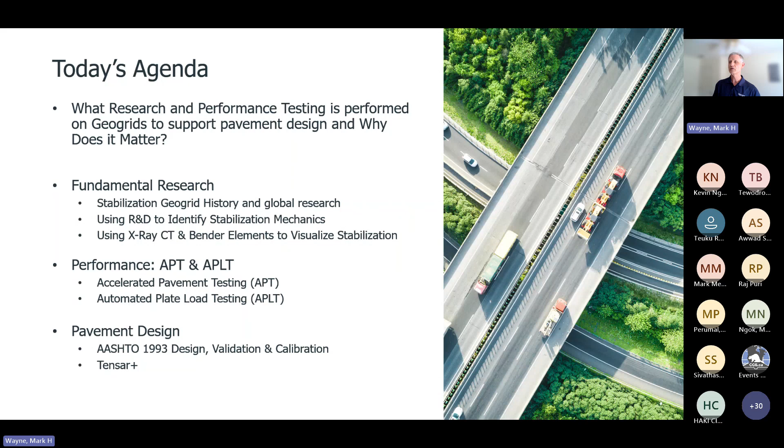So in following along in those footsteps, we're going to look at fundamental research that at least our company, TENSAR, has been doing for many, many years. We're going to look at performance testing. And what do I mean by that? I mean, you can do the fundamental research to kind of put your head into the position of seeing what's going on, but then you actually have to take that information and do performance testing. And then we're going to talk about how we take that and roll that into pavement design. Because of the time limitations, we'll talk about one aspect of pavement design, okay?

So, fundamental research. The one thing that Dr. Koerner also impressed upon the world by his book that he published, Designing with Geosynthetics, is that we fundamentally design based on the function, right?

So I like to tell people, what does that mean to the common person that doesn't know anything about geosynthetics? What I tell them is, you can buy Velcro to hold your pants together, to hold your shoes together, or to stick a painting on the wall.

If you put it on your pants and your pants have to go through a washing machine and be agitated, there's different criteria for how much Velcro is there. If you're putting it on a wall, you better make sure it has the proper capacity to hold it on the wall. So geosynthetics are no different.

You have to look at the function, what we're doing with the geosynthetic. Are we putting it in the ground to separate things and provide filtration and drainage and all these different functions? What are we doing with this?

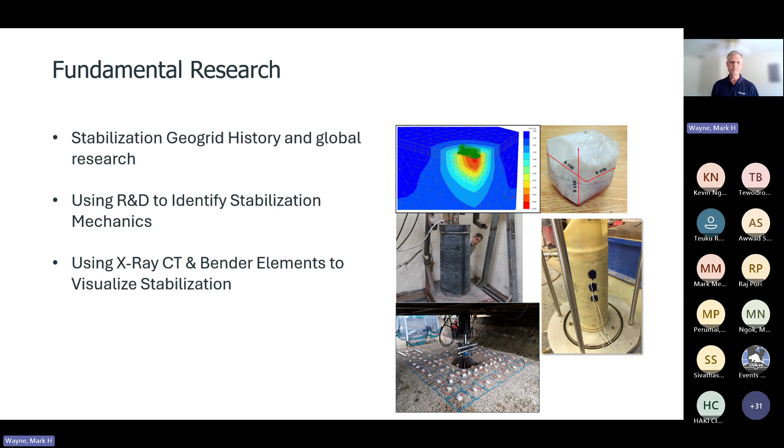So we're going to cover a little bit about what geogrids are used for primarily in the field of transportation engineering. We're going to identify the stabilization mechanics and then talk about some of the research going on at universities and actually at our facility as well.

Stabilization is literally defined as the improvement of the mechanical behavior of unbound granular material by including one or more geosynthetic layers, such that the deformation under applied loads is reduced by minimizing movements of the unbound granular material.

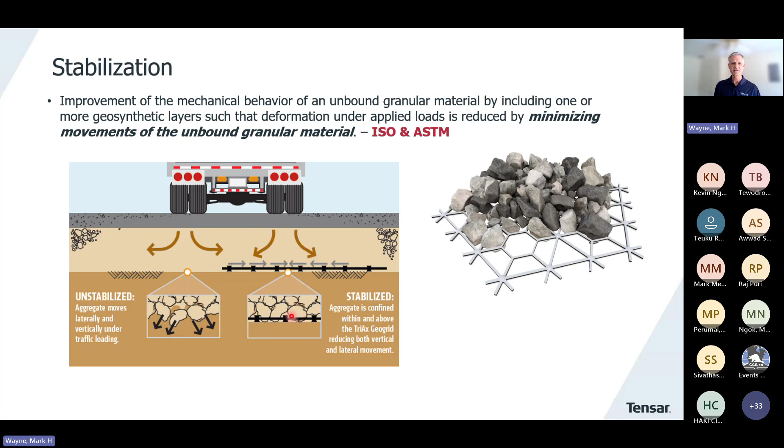Now, many people know, you hear it all the time: 'Hey, I have this geogrid, but it's got a square aperture, is this good, can I use this?' But wait, I also see there's one with a triangle, is this good, can I use this? And the last, you're going to see one that has three different unique aperture shapes.

You would say, well, what differentiates these materials? The key is that as we evolved with our education, in the sense that we did some of this fundamental research, we realized that the shape of that aperture and the shape of the ribs control the behavior of the surrounding material. That's pretty important.

So over time, the aim has always been to perform fundamental research to find out how these shapes work, in fact, before we put these shapes into the market, they're tested along the lines we're going to talk about. The idea is to increase particle and geogrid interlock, increase that confinement, and increase trafficking performance and value.

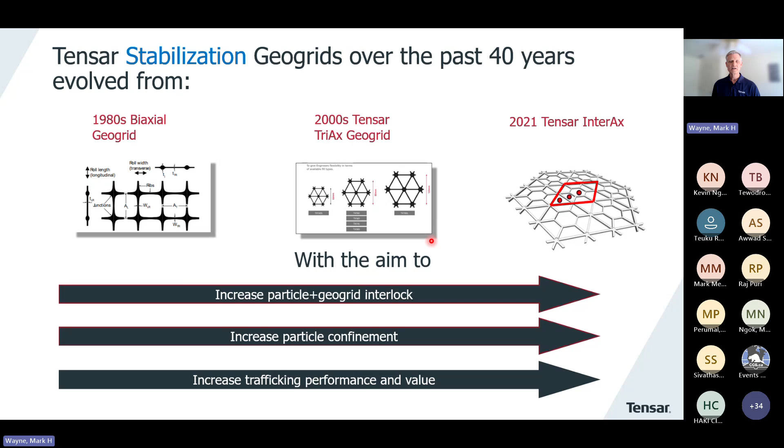So having gone from a square or a rectangle to a triangle, the reason for that first jump was because we realized that particles pack better in triangles. The next jump, which we weren't able to make when we started out performing manufacturing on triax geogrids, was how do we get multiple shapes, multiple apertures into one geogrid?

The reason for that is we also know that although particle packing is great, that packing is good for one set of particle sizes. So if I have a triangle, it's a single shape. If I have multiple aperture shapes, it's going to interlock a range of particles into the structure. And that's exactly where we've moved.

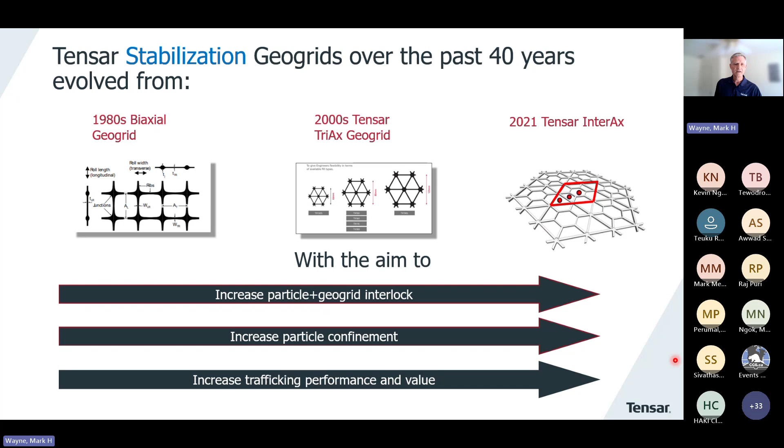So back to stabilization. The key here is that by having these particles interlock with the aperture, we also want to make sure the rib is not laying flat. That was the original generation.

The original generation, the biaxial geogrids, were used for embankments and those sorts of things, basically going out on swamps and placing material on swamps. In that particular case, you were getting separation, and if you needed a geotextile to go underneath it, you would add that.

And you'd ask why that's important. Because if you can keep all the particles together and prevent them from moving, you also prevent them from rotating in place. You prevent rotation, you prevent movement, and as a result you limit deformation - you get less deformation. By doing that, you also increase the shear capacity of that composite, which increases bearing capacity - something all these projects desperately need.

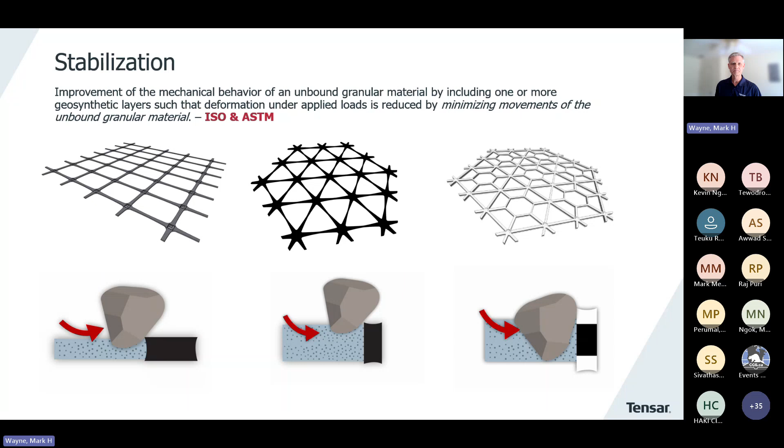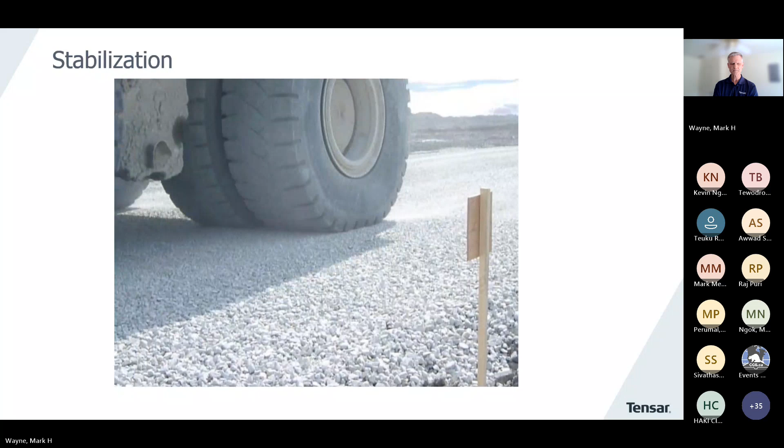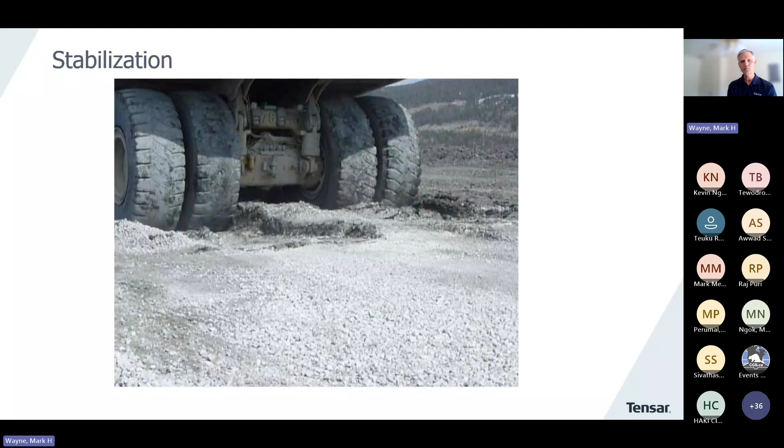Everybody wanted to prove to themselves that the geogrid was going to work for them, so they built a test section. And there you go - that's what would happen if they put this material onto the soft soil. So what you see here is not stabilization, basically you have punching failure.

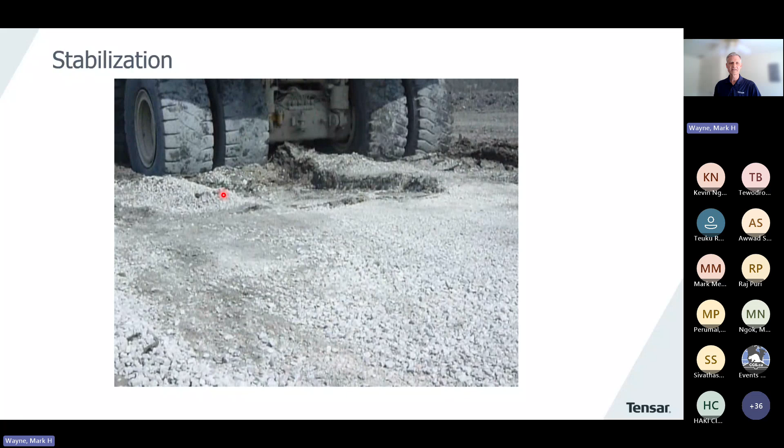In the early days when we started to get instrumentation to see what's going on, we worked with Penn State, and they said, how about if we build ourselves a smart rock and put the proper instruments inside of it so we don't need wires. We said if you can manage to do that, we're all on board. So they managed to do it.

Our first set of tests with a smart rock were done to look at ballast behavior - what happens under the dynamic loading effect of ballast, which seems to be what a lot of people are concerned about, especially because if you get a lot of movement of particles, you get particle rotation and movement, and that causes breakdown of the particles over time.

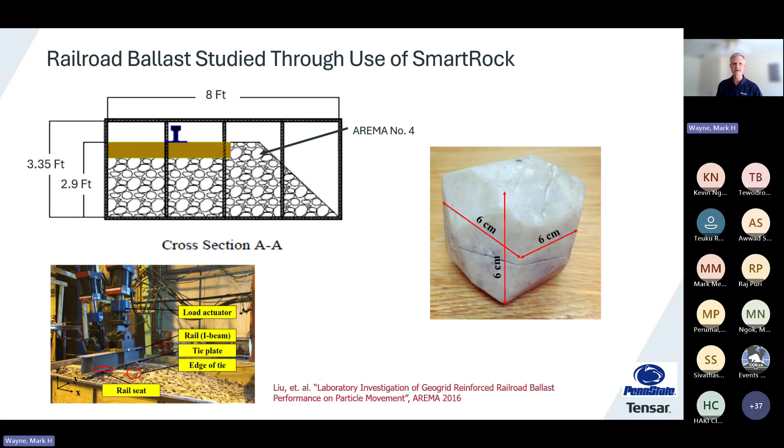In rail sections, they have to go back and fix that - they have to pull the track up and replace that material. So then you'd ask, how do we have them prove to us that this thing worked?

They did this little video for us and showed, here you can see rotation - there it is. And then you can see translation. So those were the things we really wanted to look at.

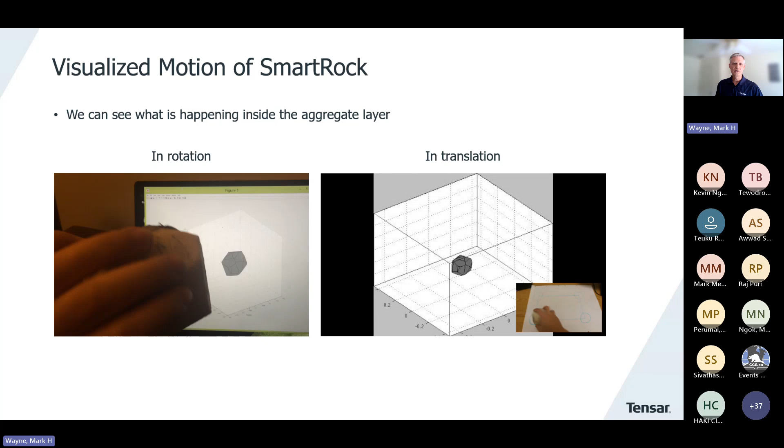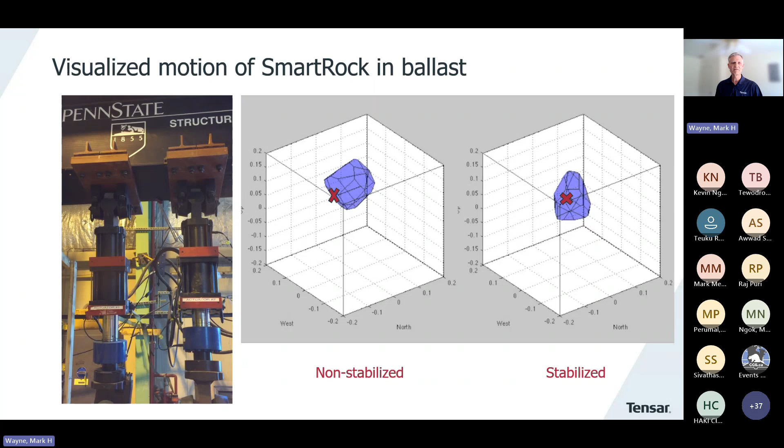During testing, they were able to plot this up. The X is at the center of the smart rock in the non-stabilized and stabilized section. We put these underneath that load, right under it. You'd imagine you'd have more confinement directly under the load.

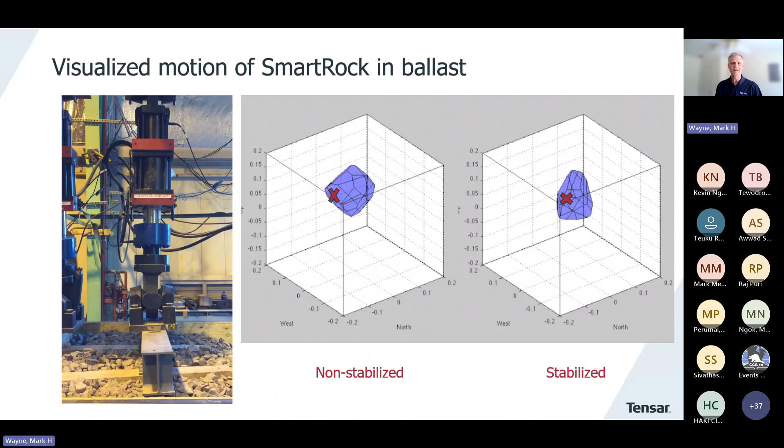But as you can see, for the case without the geogrid, you were getting a combination of rotation and still getting movement of that smart rock within the system. If we plot this up, looking at the smart rock under the rail seat versus under the edge of the tie, you could see very clearly that for the stabilized sections, we basically stopped movement, which everybody was really amazed at. It's pretty amazing when you see this.

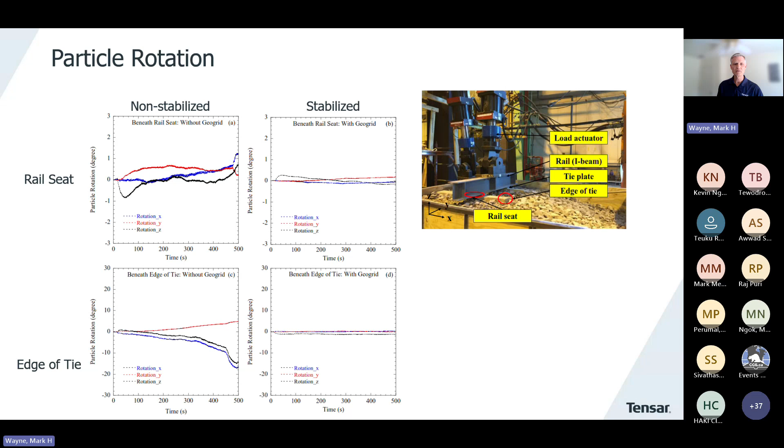This in particular is particle rotation, and if we can keep those particles from rotating, that's the first step. Then there's particle translation. We do see some movement, but the interesting part is those particles - because when you have a geogrid, a lot of people have heard the term compaction aid.

They're called a compaction aid because when particles nest inside the geogrid as you're compacting, they nest to the lowest potential energy they could possibly have, meaning they're not just sitting there. As someone asked about this, I said imagine if you have a brick - if you stood the brick on end, it has high potential energy, but if you lay the brick flat, it can't move much beyond being flat. So the idea with the geogrid is that we prevent the particle from rotating.

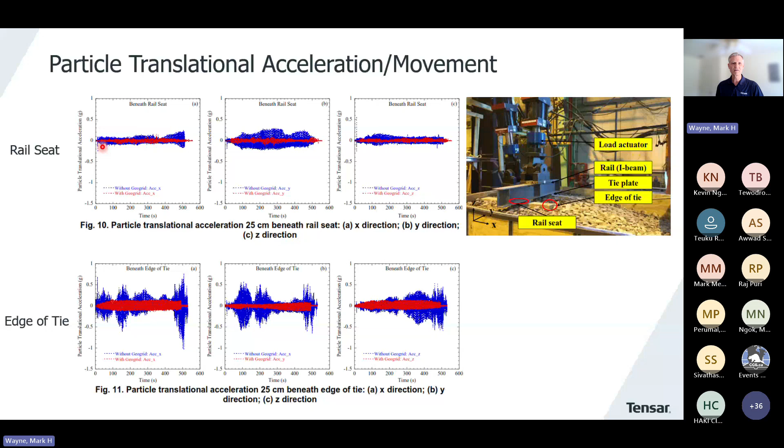If we then plot simply the vertical displacement versus the permanent deformation, you see there's a dramatic difference. Along the lines of rail, we have the University of South Carolina right now doing some full-scale testing with our InterAx products to look at that. In fact, we're taking it one step further, looking at saturation. The biggest issue is when it's dry, things could be great, but as that track section gets saturated, things change pretty rapidly. So we're looking at that now.

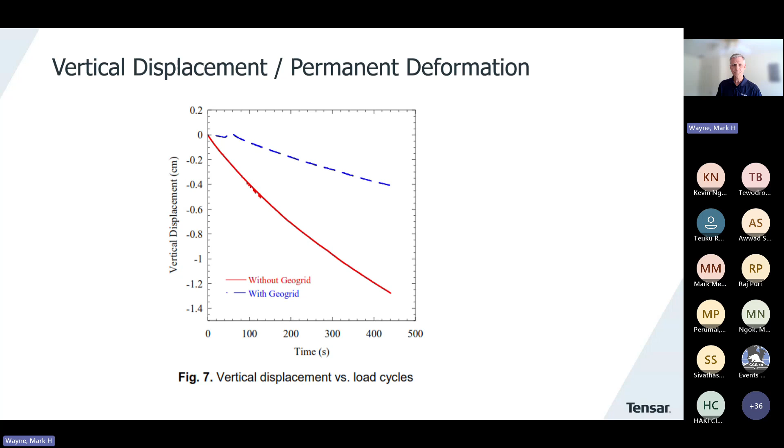So the other thing we do is we need parameters to put in our design. As I said, we have to do some fundamental testing. On the right side is a triaxial cell, 0.5 meter in diameter by 1 meter high. You can see we're taking measurements of how much this bulges along the extent, getting the lateral strain, and finding out this influence.

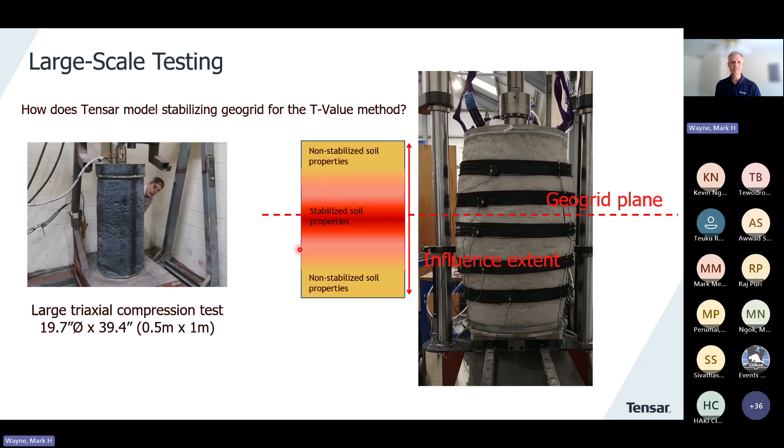If you look at this graphic, you can imagine that the geogrid, when placed, has the greatest influence around the geogrid itself. The neat thing is when we plot this up, what we've noticed time and time again is that if we look at load versus axial strain, when we incorporate the geogrid, there's a huge amount of strength that is imparted, so there's greater ductility. If we look at the curves without the geogrid, you can see it drops off over a much larger axial strain range.

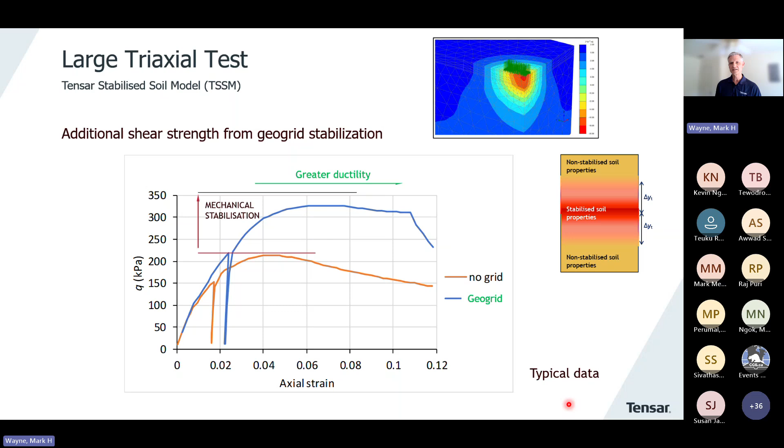And then we can take this information - we've taken that and put it into Plaxis. So we've actually developed our own TENSAR stabilized soil model that is utilized to run Plaxis models.

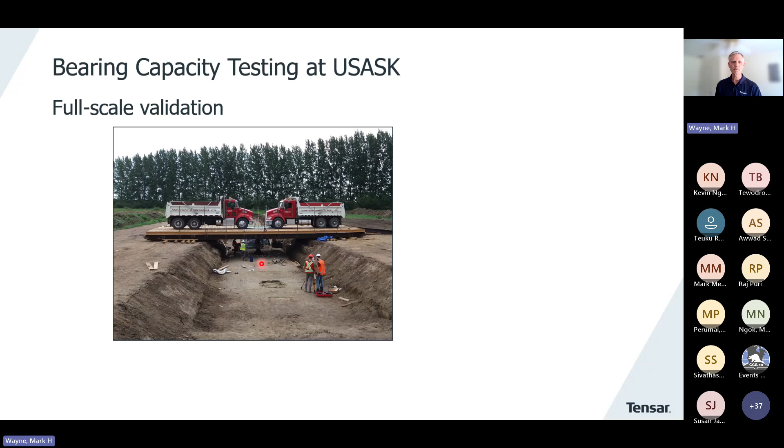And here's work Ethan's very familiar with, looking at plate load testing up at the University of Saskatchewan. Very uniform soils here that we wanted to test, very soft, with the platform on top. These little blocks are for video and photos, getting an idea of the influence of this vertical load on the surrounding area. And we're using a 1 meter square plate.

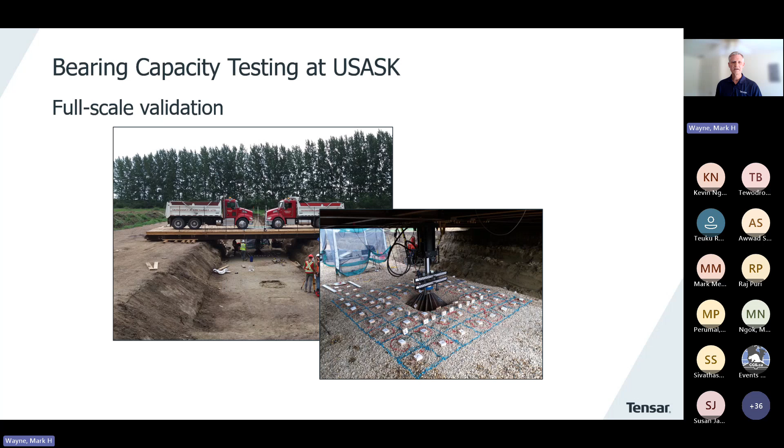You'd ask yourself why? Because heavy haul road equipment, that's the area they're going to apply. Working platforms, cranes, that's the area that gets applied. So we wanted actual information that could be input to design. Now, back to what I said, you saw the large triaxial cell - if we look at the plate pressure versus displacement, look at the curve, you're getting a similar curve. So that's critical.

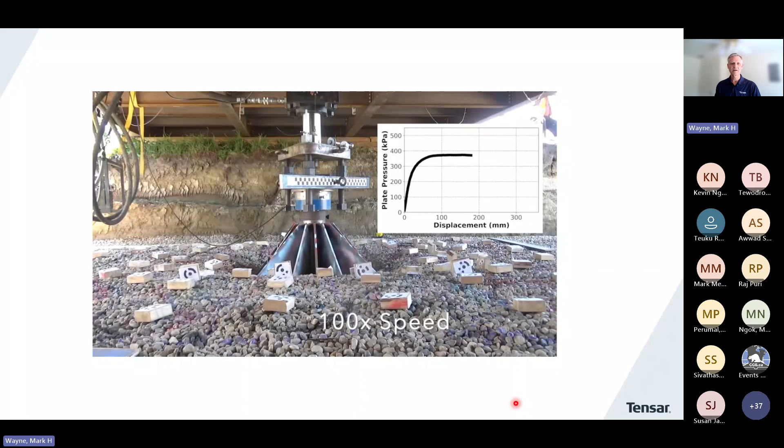Now the latest thing is - we talked about a smart rock, full-scale testing to get some design parameters, and triaxial cell testing to get design parameters. The question then came up: okay, you keep telling me, Mark, that this rotation we see in the ballast - but ballast particles are fairly large, so that sort of makes sense to us. What happens for other particles more along the lines of a road-based material?

Interestingly enough, at the University of Grenoble, they perform X-ray computed tomography. Somebody's like, wow, what's that all about? If you go to the airport and see these big igloo-looking things your bags have to go through, those igloos are performing X-ray computed tomography in real time. They're actually able to see your bag, rotate it, and look inside at elements that are there. So X-ray CT is something we really want to do work with, and they said, hey, this is great.

We can put some geogrid in a cell, place the particles, apply a load, and see what happens. So you have sample prep, you do the scanning, and then you do the image analysis - it's a multi-step process. I show this sand sample because they have to rotate it, right? So they perform the X-ray - obviously this isn't the igloo you see at the airport.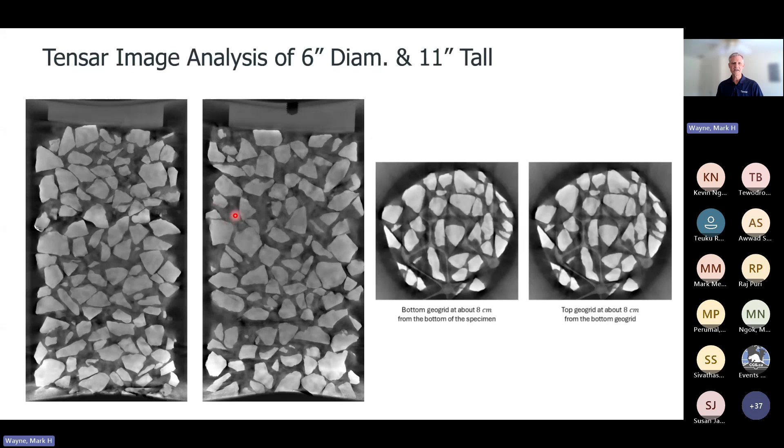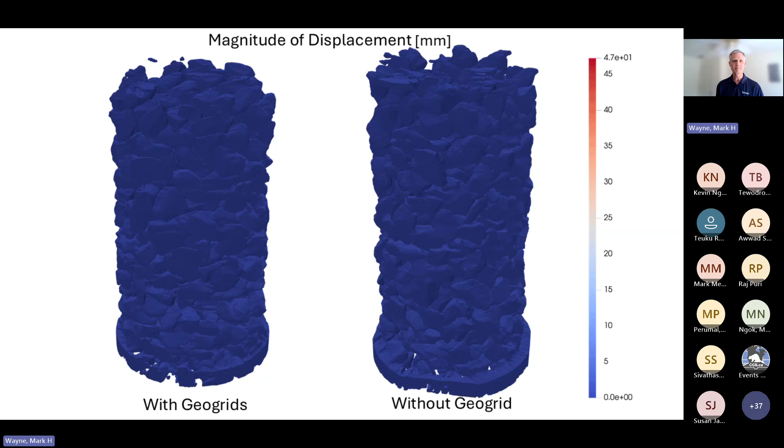So having this information and performing the CT analysis, we can clearly see every single particle, like every one of these particles is a smart rock for us. First off, we can see the displacement that occurs, and without the geogrid there's much greater displacement. We can also see the rotation of every one of those particles. This is phenomenal stuff, right?

Just looking at the first case, and we're doing more research along these lines, the stabilization effect is 82% reduction in deformation for the sample and 73% reduction in particle rotation, which is very impressive given the variability of aggregates in and of themselves.

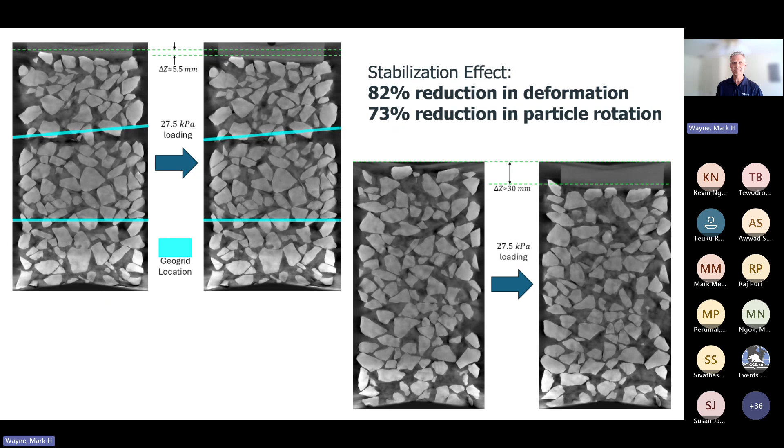So that was that. Now let's talk about bender elements. A lot of people may have read about this, it's out there on the internet, and you would ask, well, what are bender elements?

Well, the other question that came about is in some cases, some of the tests don't show that we've increased the resilient modulus value as much as we would have liked to. But wait a minute, we know that the deformation is reduced—there's like next to no deformation.

So what's going on is that some of the test devices, when you run a test on the surface in the field, you're testing that composite value on the surface. So sometimes you're not getting that stiffness. You would actually have to decompose the results of the test to look at what's happening from a standpoint of resilient modulus of that aggregate just by itself in relation to the subgrade. That's been a tricky thing.

Because in many cases we're using the foundational layer as the geogrid over a soft soil, then we're putting the geogrid, then aggregate, then geogrid again to serve as the foundation for the pavement on top. This happens for soft soils. So you'd have to run those field tests on the subgrade, and then on the aggregate as well, and probably do some computations to see what's going on.

Another way to do this without trying to correlate the results would be putting some bender elements in. As this graphic shows, it's a piezoelectric device where this end element is flapping like a fish—if you pull a fish out of water and it's flapping around, that's what this is doing. Basically, it's measuring the small strain shear modulus of the soil.

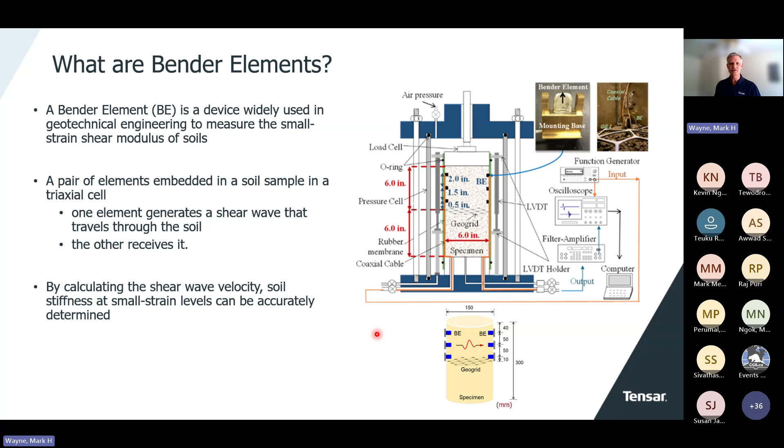Recently, University of Illinois, Dr. Tutumluer did some fundamental research on this, looking at a variety of different geogrids. We talked about how the shape matters, the aperture, the construction of the material, and the ribs—how does that all figure in?

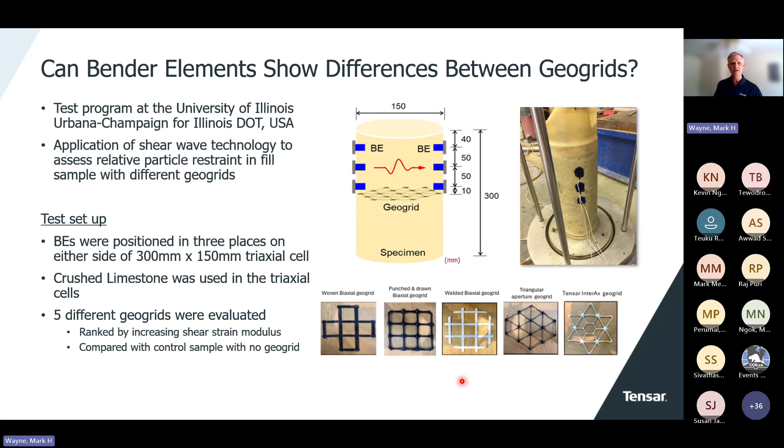So they used crushed limestone along the lines of road material. They looked at 5 different geogrids in the test, and what they found is shown here. As far as the difference measured between geogrids for the bender elements, there was higher small strain shear modulus measured closest to the geogrid, which makes sense. We'll see this in a graphic here.

And as you get further away, it decreases. But also keep in mind, this test is being performed under different load states. But then again, we don't have asphalt or concrete on top of this weighing it down. So this is just a triaxial cell test.

So basically, if we looked at a woven material, imagine the ribs are flat—it's woven, so it doesn't have that stiffness.

We looked at 8% lower small strain shear modulus, a biaxial 10% higher, and a welded material 13% higher.

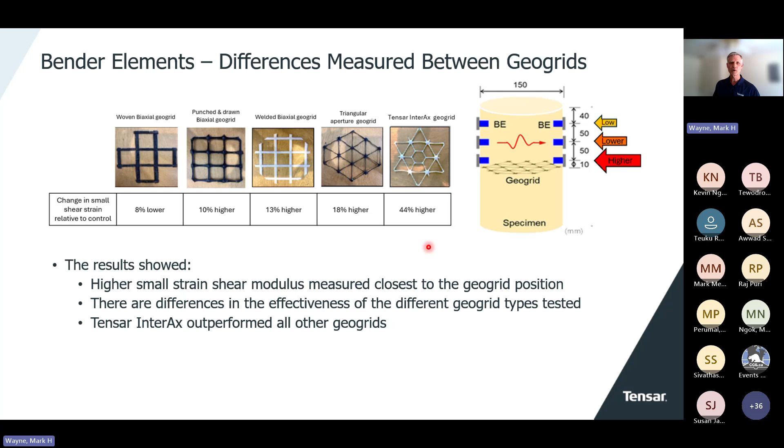The triax, which has higher ribs, showed 18% higher, and 44% higher for the multi-aperture. This proved to us that having multiple aperture shapes that interlock increases the statistical chances of interlocking more of the particles within the apertures, which has a huge effect. Along the lines I said at the very beginning, achieving this geometry and shape is achieving the goal we want.

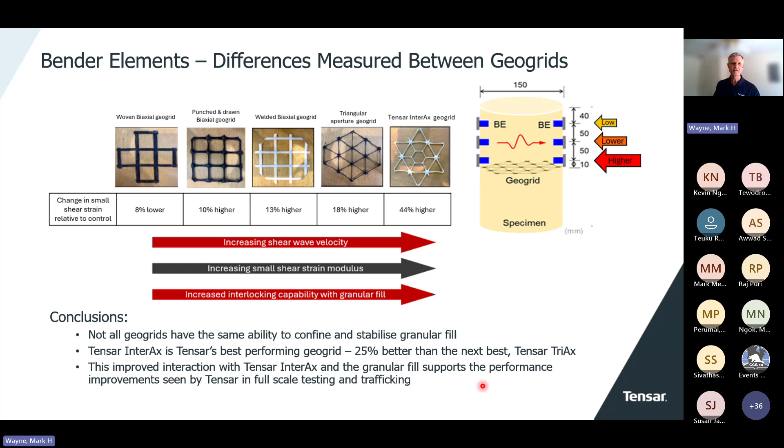So now we've done fundamental research to help get design parameters and also convince ourselves that it is important to prevent particle rotation, and it is important to make sure the geogrid has the right apertures and the right rib height. So what about larger scale or full scale performance?

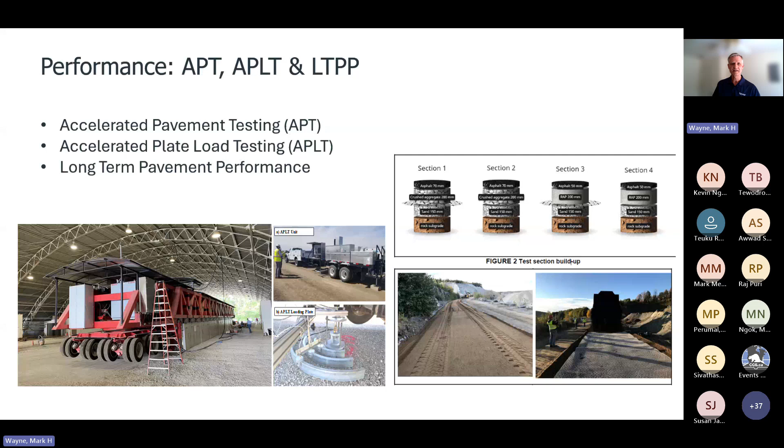But we're going to talk about some of these things here. There are research reports readily available for the things I'm showing you today.

If we look at the accelerated pavement testing, the idea is to basically prepare a road section, in this case an asphalt paved road section, with a section without the geogrids and sections with the geogrids. I'm going to show another video, hopefully that will work for us.

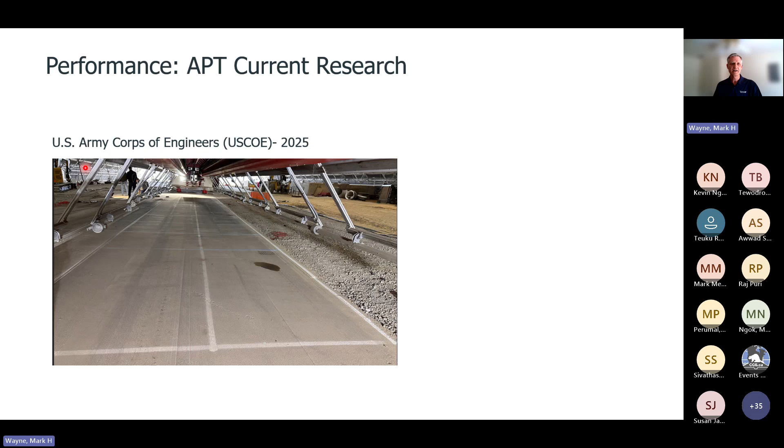You can see there are these elements for heating the chamber, and then doors go on the outside of this. The wheel's not here yet, but there will be a wheel.

For this most recent research we did, we looked at InterAx in comparison to the control, and we also changed the thickness of the layers so we have an idea on the design parameters and how well those design parameters can be utilized in the actual design.

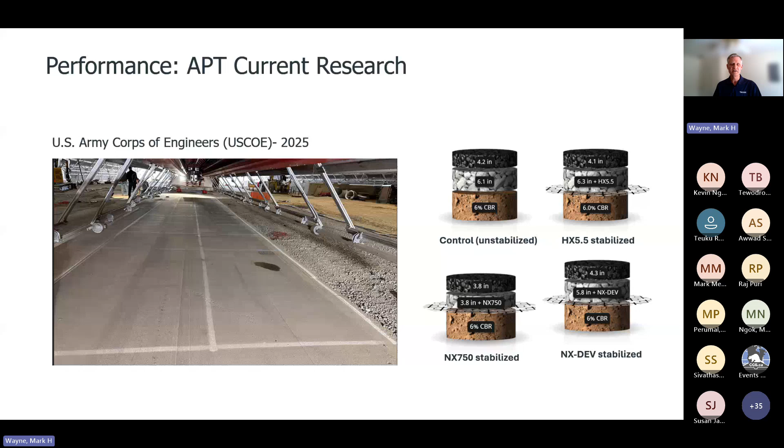And you have to instrument the heck out of it, right? So a lot of instruments were placed: multi-depth deflectometers, subgrade earth pressure cells, base course pressure cells, and asphalt strain gauges. The idea for the multi-depth deflectometers is to look at each of these layers and see how they're moving as the wheel is moving along the surface.

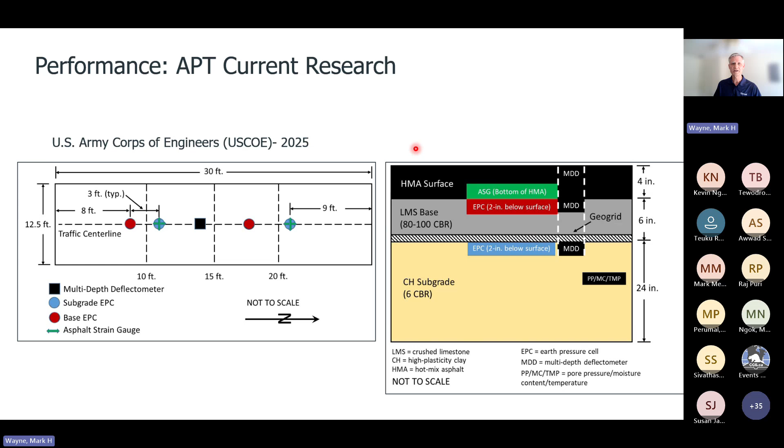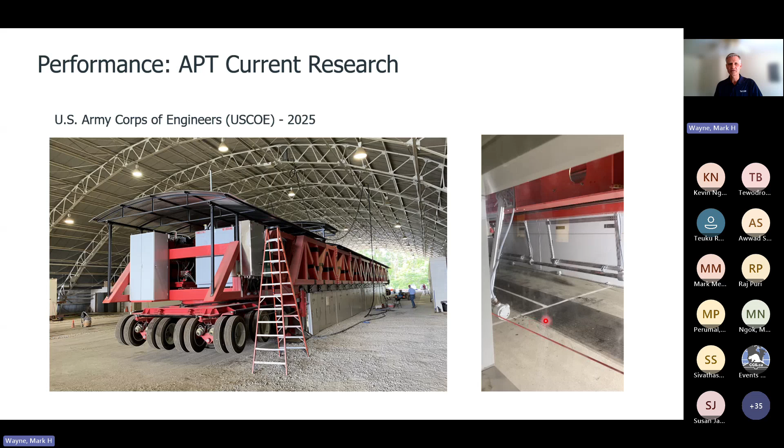You can see here that we have basically an environmental chamber, because we have these panels, you can see them over here, placed on the outside and insulated so that they can maintain the temperature. We want to maintain proper temperature inside and traffic the pavement section.

Now, automated plate load testing - imagine we've got all these design parameters, we've done the testing at the Corps of Engineers, and then somebody says, oh, that's all great, but what about in the field? What are you actually getting in the field? Well, if that's the case, we need to actually do plate load testing in the field.

What you see here is the piece of equipment. The equipment has to be weighted properly so that it can resist the force associated with the plate load test. You also have to have these steel bars here, because what are they doing? They're actually measuring the deflection bowl that occurs as a result of this load.

Now, every project's different. You would say, well, why don't you just run one or two tests? Well, we had to run a lot of tests because each environment and each aggregate is different, obviously. We try to get this parameter along with the large triaxial cell parameter that you see, so, for example, we can fill in the gaps of our knowledge.

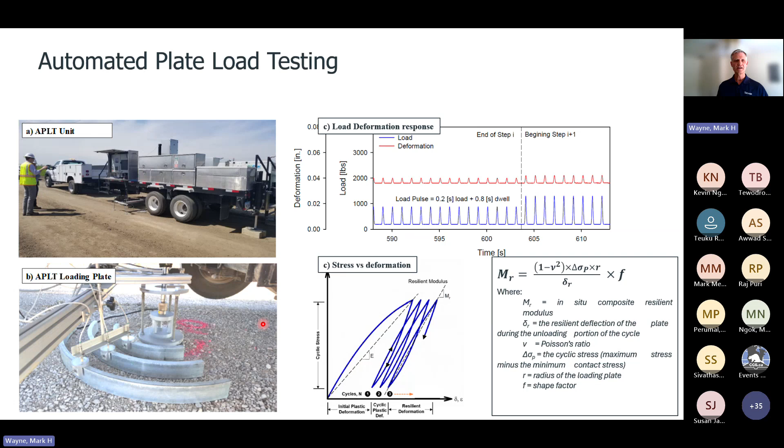So this could be crushed limestone, or we may have a different type of material. We can actually test those materials in a large triaxial cell and see how they fit in with the results of this sort of field work.

We've also gone ahead and taken all this information from the field and put it into a neural network to do analysis for deformation. Here's a graphic showing dramatic differences in deformation that occur with and without the geosynthetic.

So the bottom line is permanent deformation, right? That's what the end user wants to look at. What's going to be the effect of having this geogrid? In many cases, people want to save money on the road, so we're making the roads thinner, and we want to make sure the permanent deformation is minimized. That's the goal, and that's easily done.

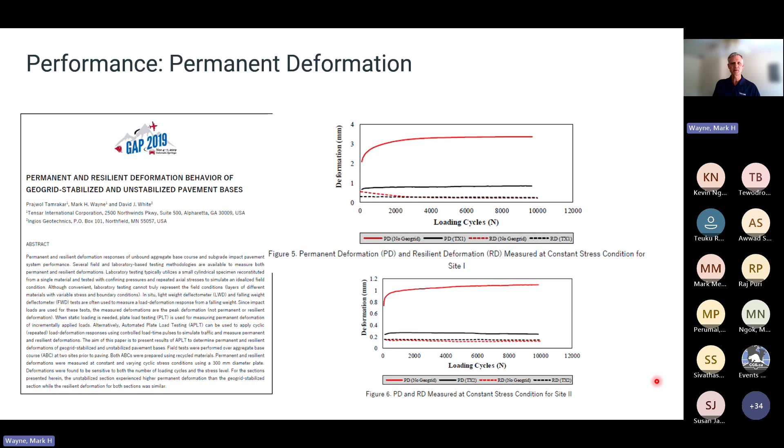The other important thing is that we want to make sure tests are done over a lot of climatic zones. That's important for mechanistic empirical design. I don't have time to go into that today, but it's very important.

So not only have we done a lot of testing in the West, what we refer to as the Western Hemisphere, we've done testing in the Eastern Hemisphere as well. We've been doing this plate load testing since 2014. Our database is massive and gives us the information we need to assure our end users that our design is highly accurate and is going to yield the results we say it's going to yield.

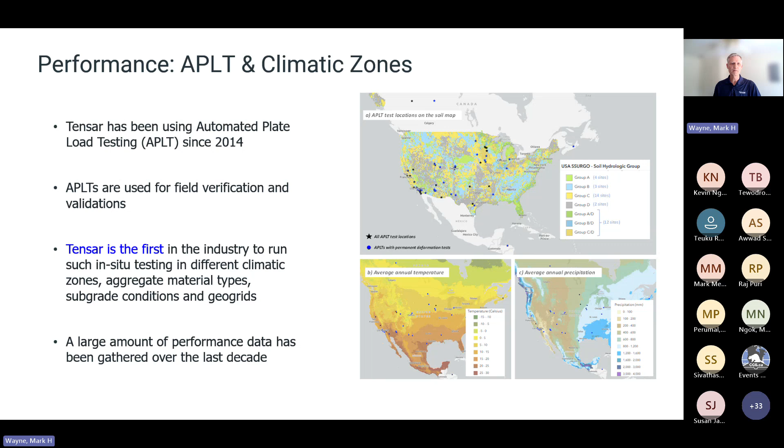APLT tests were initially used for field verification when we were in the research phase, but then it rapidly moved to our field engineers just using it to collect data and also assure the customer, hey, we designed it, here's our design, and this is the result you're getting from the actual tests in the field. TENSAR was the first in the industry to do this sort of work.

So that's important, and as I said, we're getting to the fact of using machine learning techniques as well. So now that we have this massive database, think of what we have. We have the tests done at University of Saskatchewan, for example, tests not mentioned, the large triaxial cell, accelerated pavement testing, and APLT in all these different temperature environments. The next step is to take all that and let AI take over. Let's model this. We can actually model permanent deformation and be highly accurate.

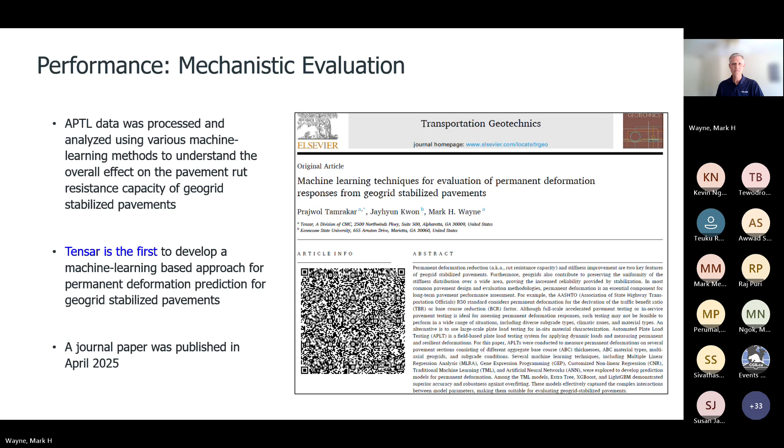Okay, what about long-term pavement performance? Some people say, well, how do I check to see that this new road we just designed and built is going to work? Well, we know it's going to work, and we've been doing long-term pavement performance as well for a number of years.

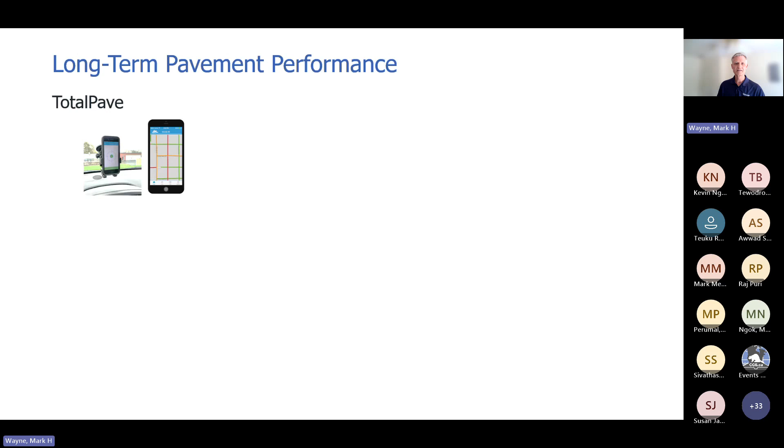You can download an app on the phone these days, and from that we establish, basically you're getting that vertical movement over distance on top of a road to compute the International Roughness Index. We use a company called TotalPave, though there are a lot of companies out there today. Basically, you're using all the technology built into your cell phone, which is placed on the windshield of your car.

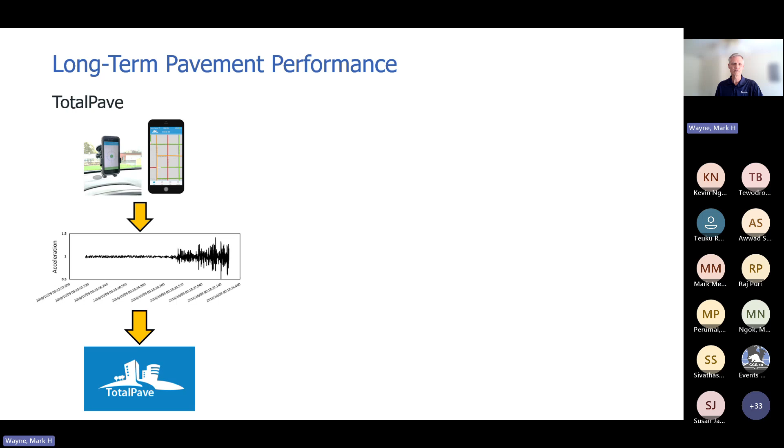It was interesting because we had some engineers saying, well, wait a minute, we paid all this money for a profiler, and you're telling me this is going to give similar results? And guess what, it does. It's been proved, and there are papers written on it. You can look them up from the TRB conferences and from the websites of folks like TotalPave.

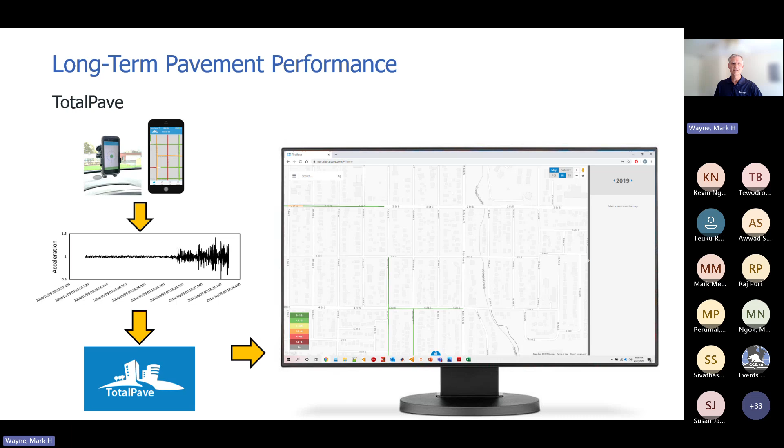And we keep all that data, so we have a large database of all this information. From this information, two things can happen. Before somebody wants to do road construction, they run their own profile across those roads, and they determine what sections are really bad and what are not. The really bad sections need geogrid designed into them, because there's likely some foundation conditions that demand it.

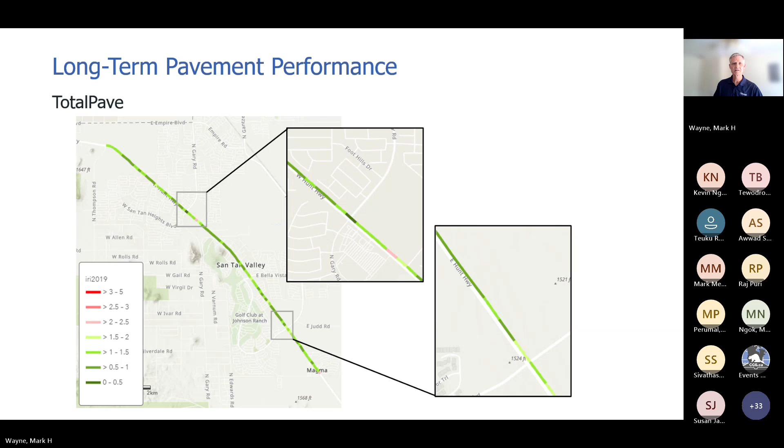This is a case where we had a project out in Arizona, and this is over a period of, I think it was 2019. So this is a snapshot, but roughly four years, looking at that performance over that time. It's pretty impressive. We're doing this all over the world, and we've written a lot of papers about this.

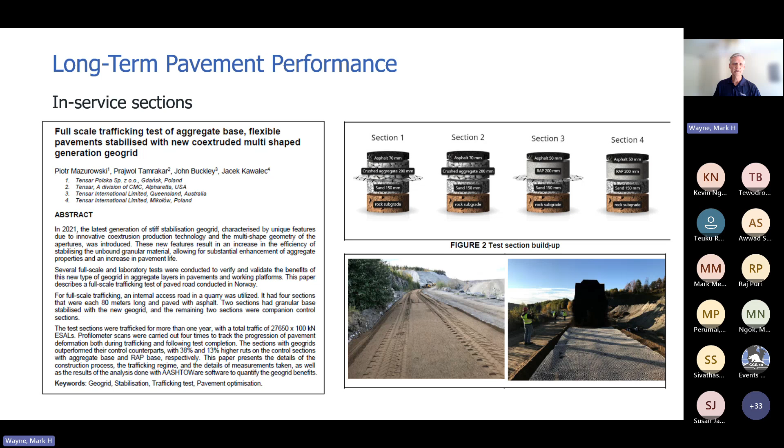And most recently, for the InterAx, we went to a quarry and asked them to use it to look at several different scenarios and evaluate the permanent deformation at the quarry by looking at the InterAx geogrid.

When we looked at this table, it's hard for you to follow given the time of the presentation, but in general, we were looking at traffic that was nearly 30,000 passes of 100 kilonewton loads.

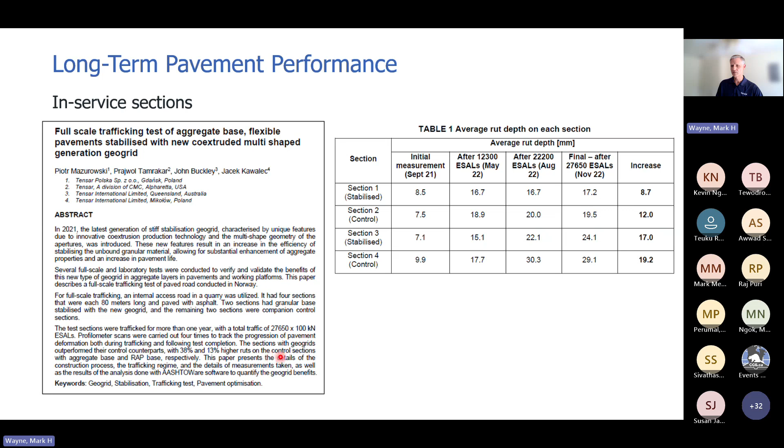If we look at the profiler scans, the sections with geogrids outperformed their counterparts. We had different sections: in the first couple, sections 1 and 2, we used good aggregate, and in the second set we used RAP. RAP will deform more than good aggregate on its own. With the aggregate, we saw a 38% reduction in deformation, and with the RAP, a 13% reduction. Pretty significant for them based on the quarry and the loading from full trucks.

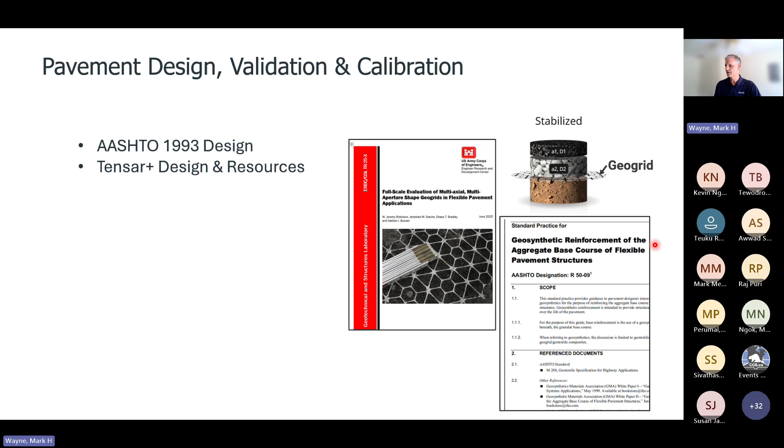Now we take all that information and put it into a design approach. The one I'm going to talk about today is the AASHTO 1993 method. Many of you are aware of that. We have design software that runs through these calculations, predicated on the research we've done, documented in R 50-09 - the geosynthetic reinforcement of aggregate base course of flexible pavement structures.

So if we look at the fundamental design equation, what does the geogrid affect? It affects the structural number. What's the simplistic equation? The structural number drives the thickness required for the pavement based on the loading. It's a simple equation - a structural coefficient times the thickness of each particular layer. The first one is your asphalt, then aggregate, etc. If you have multiple layers, you can carry that on.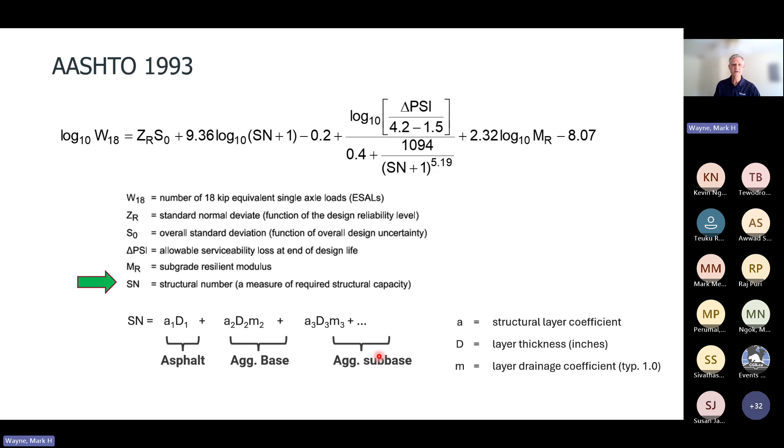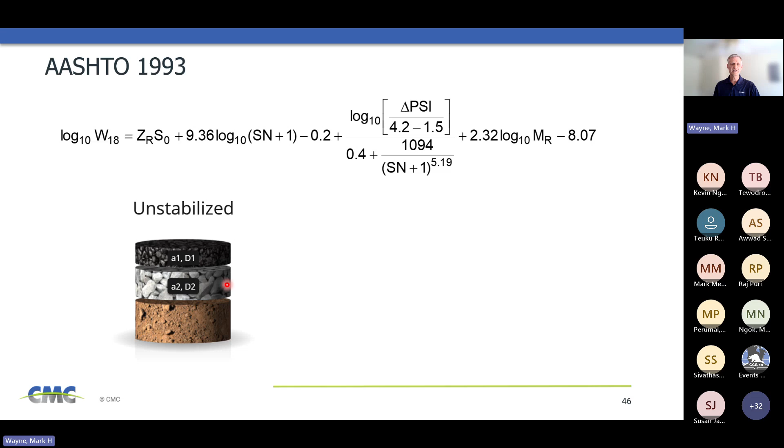This is the asphalt, this is the aggregate base, and this could be the sub base and other materials, depending on what you're putting in the road cross section. If we look at unstabilized, you'd have A1D1 and A2D2, and the stabilized is the same with the geogrid. So what are we changing? There's a base equation for this, and a factor gets applied to that structural value when you incorporate the geogrid - that's where it gets applied, and that's how it affects the structural number.

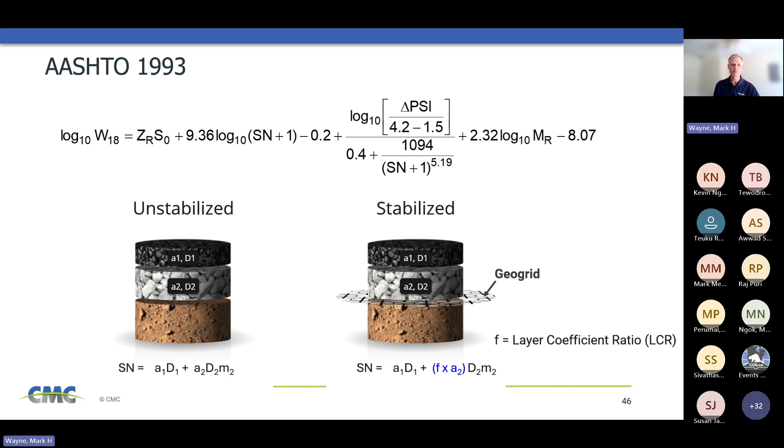I just put this over here - that's the layer coefficient ratio. Again, that's in document R5009 if you want to read more about it. Right there. And I just put this in here as an example for the report.

Now we can go to TENSAR Plus. The nice thing about TENSAR Plus is you can put the design in place. You have your HMA layer thickness, can have multiple layers, and you have the aggregate base. You can place that in there, select the geogrid, put in a subgrade resilient modulus, whether you want a separation geosynthetic, put your reliability, standard deviation, serviceability, initial and terminal to drive the calculations. And then we can also perform right in here the cost calculations - that's how you get the value out of all the information I just presented.

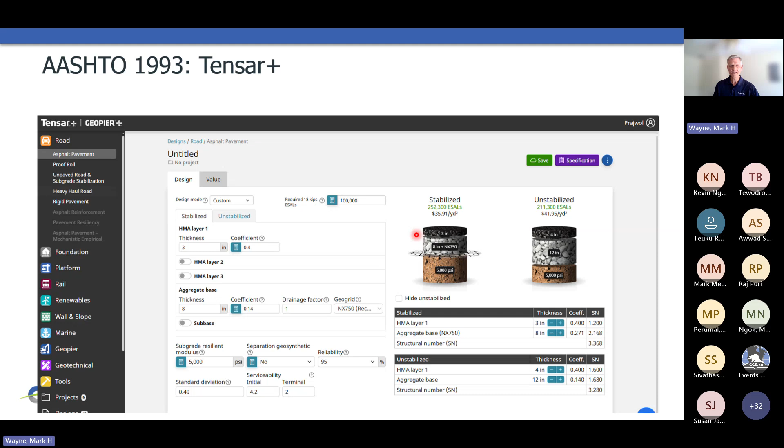Furthermore, what we also realized is that incorporating the geogrid is going to affect the construction cost. The idea is by incorporating geogrid, sometimes we're extending the life, meaning we keep the sections the same thickness. But most times people want to reduce thickness if they can get the design sections they're looking for, because everybody's budgets are tight and they want to design for a certain amount of time and make sure this is saving them money in the end. So you can see here, we can compute that construction cost. The other thing is construction time.

A recent case I bring up for people is the Illinois Tollway Authority. What they did was kind of unique. People were pushing back at the time, this was a couple years ago, on using geogrids at all. And the engineers said, well, no, we need to use the geogrids, because if this road does not open by October 1st, there's penalties. To help make sure it does open October 1st, we're going to put a geogrid section in there.

When we put the geogrid section in there, if you can't achieve your goal, you have the choice to move to that geogrid section. On that particular Illinois tollway project, there were three contractors involved. Two of the contractors used the original section to start the project. The contractor that used the geogrid finished the project well ahead of schedule, and I think the others looked at that and said, we're running up against a time constraint, and then they switched over to using the geogrid. So the point is, even for people who are hesitant at first, it's always good to incorporate a geosynthetically designed section into designs and allow for that flexibility.

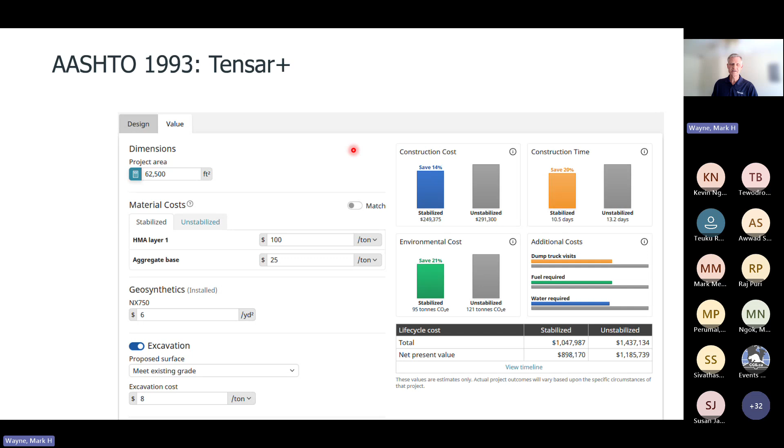So the other neat thing is within TENSAR Plus, and by the way, this is all free. A lot of people on this call may be studying this information. So if you're studying this or want to learn more, the beautiful thing is that we include resources into the software that help.

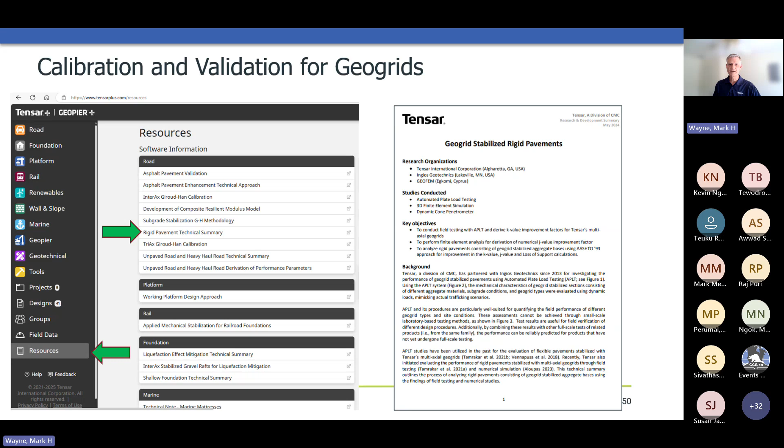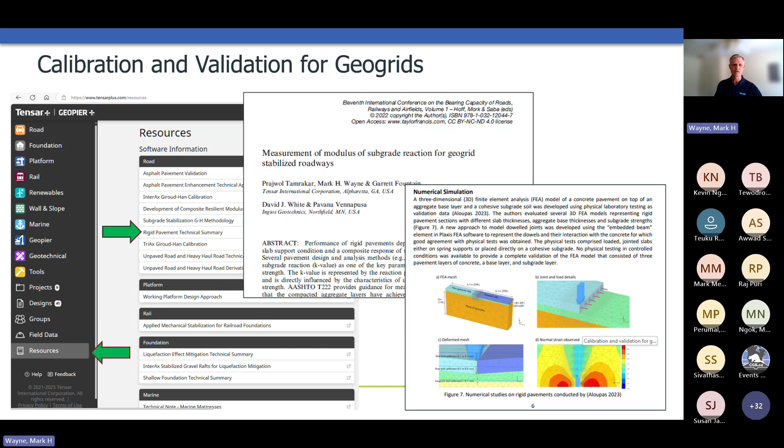What I mean is you can go into the resource section and pick a particular topic. Then you have access to both white papers and research papers related to what I talked about today, right down to numerical simulation, for example. All this information is readily available, and I encourage you to visit TENSAR Plus, if not for anything, to find out what tools and research information are available for your use.

So what have we learned today? Let's see. The fundamental research tells us that geogrids prevent particle rotation and translation. This leads to maximum particle-to-particle interlock and increased shear strength. And again, some geogrids do this much better than others.

The reason I say that is because when somebody gives you a design solution, that solution will be related to the type of geogrid. For example, for TENSAR to give you a TriAx geogrid in a pavement, I would give you a different cross section compared to one using InterAx. You have to make that choice as to whether you want the thicker section or the more economical one, so you need to look at the solution.

Nobody's claiming that any particular geogrid does not work—that's not what my presentation is about. My presentation is about the fact that as I make that cross section more economical, as I make it smaller, I want to assure myself that I'm preventing particles from getting broken or crushed by minimizing rotation. I'm making sure the particles are confined and not going to move. When you get all that, that's critical.

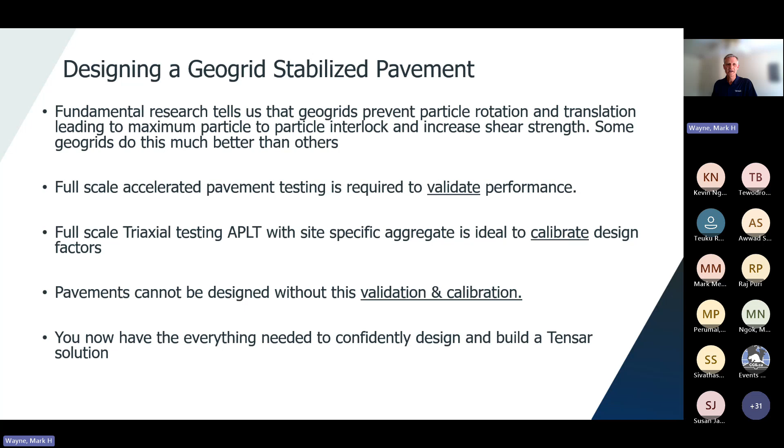So Ethan, you can take over. There you go, I'm back. That was great, Mark, thanks for the presentation.